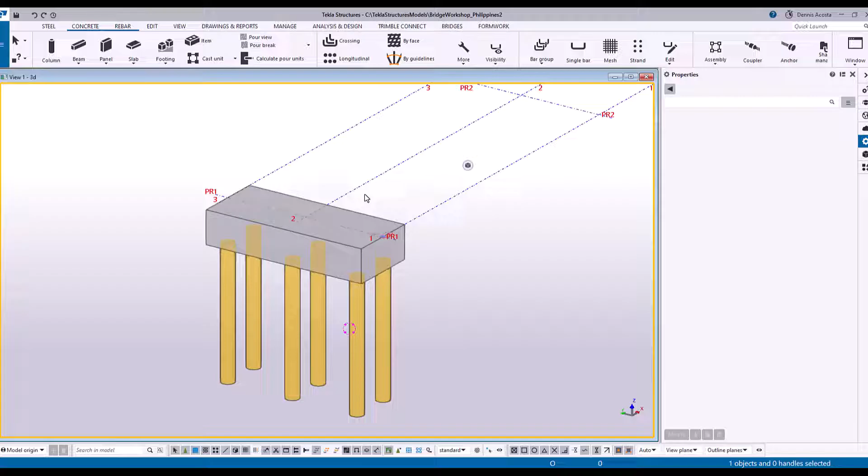Okay, sa pag-create ng ating column na itong ganitong shape, hexagonal, pwede kasi natin gawin yung halimbawa, bibigyan ko lang kayo ng sample. Halimbawa, yung slab, kapag nag-click ka rito ng halimbawa is 3,000, you don't have to follow, just demo it to you.

And then, ginawa natin siyang front, and then halimbawa is 10 meters. So I can use the slab to column, pero pwede ko siyang palitan ng handle dito sa ito, halimbawa ay 300, 300. Okay? I can use the slab.

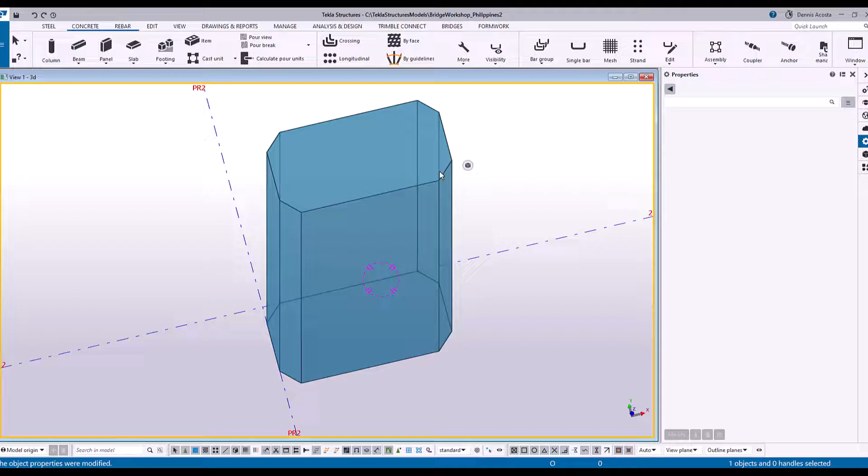Pero sa shape, pwede tayong tumingin ng hexagonal shape under ng column. Type lang natin dito is sphere. So hanapin natin kung meron tayong shape na ganito.

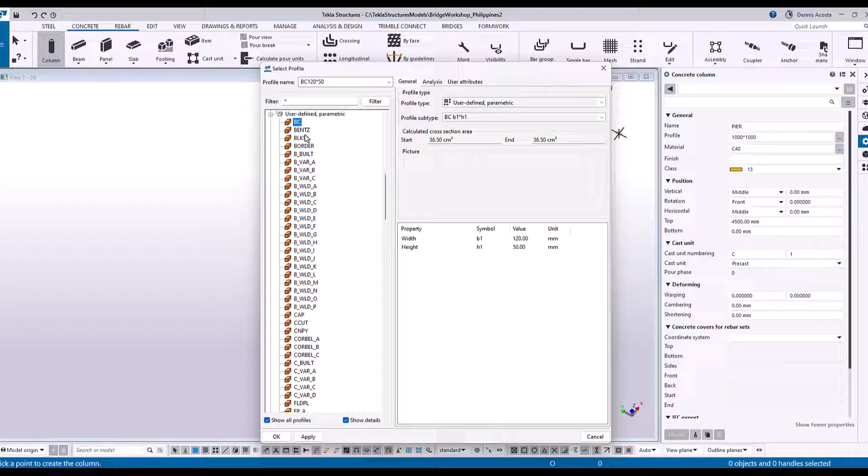Punta tayo dito sa user parametric cross section. Dito mapapansin nyo maraming mga iba-ibang shape na available by default. Okay, hanapin ngayon natin itong hexagonal column na to or yung shape na ito. I think meron akong nakita before. Since this one is parametric, ibig sabihin merong shape, then we can just simply change the size.

Ayun. Nope. I think dito na. It's like a wall eh. Ayun, this one. Hindi. Eto, this one.

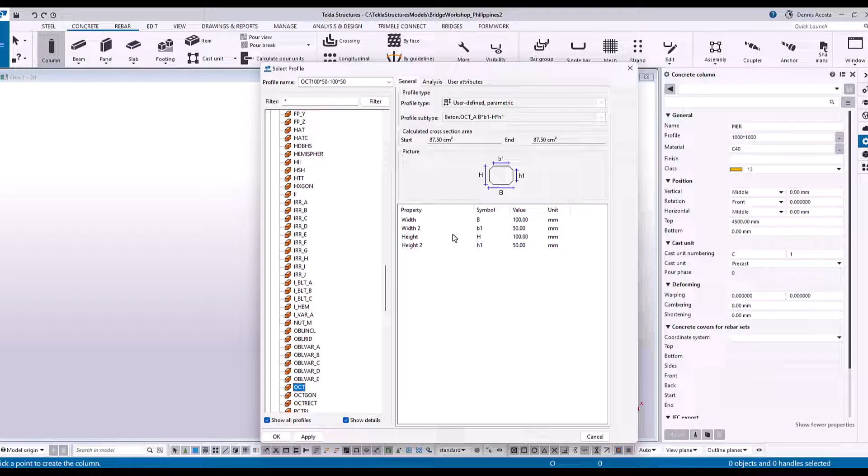Okay? So kung mapapansin nyo, meron siyang octagon. So ngayon, ano yung B? Yung B natin is, let's say, 5 meters. 5 meters yung B. And then, yung H, gawin natin na

Yung H gawin nating 2.5. Iba pala yung way nito, hindi siya chamfer. Anyway, should be okay. And then yung B1, para magkaroon siya ng chamfer, sabihin na natin na 4.5. So meron siyang 250, gawin nating ganong kalaki ba yung chamfer na gusto nyo. And any chamfer, let's say 4.4. Para 300 yung chamfer.

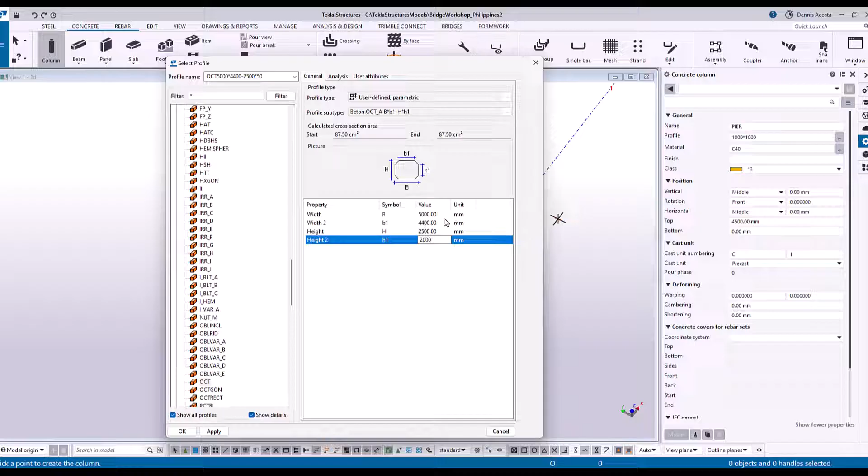And then, this time around, let us change the color. So, top is 10,000. And then, i-click nyo tong center. So, ito yung ating column.

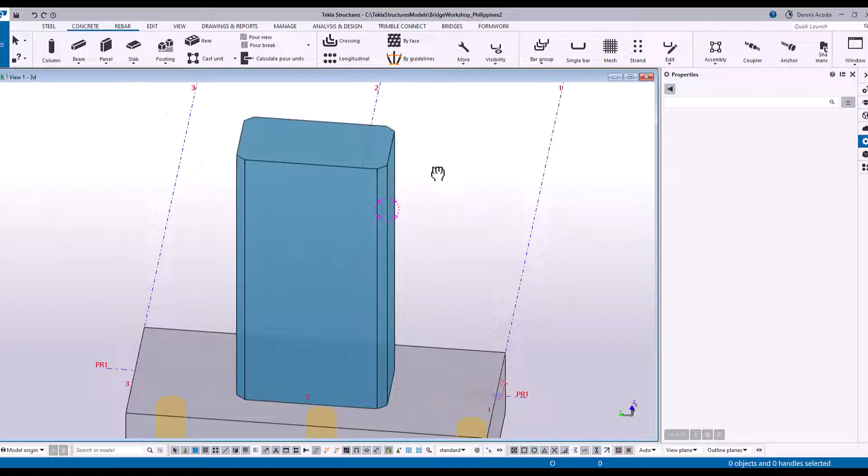So, ngayon, kung naliliitan tayo doon sa chamfer, we can always change it. So ito, halimbawa, instead na 4.4, gawin natin 4,000. Okay? And then, ito, sa halip na 2,000, gawin natin 1.8. So, you can decide kung anong chamfer ang gusto nyo.

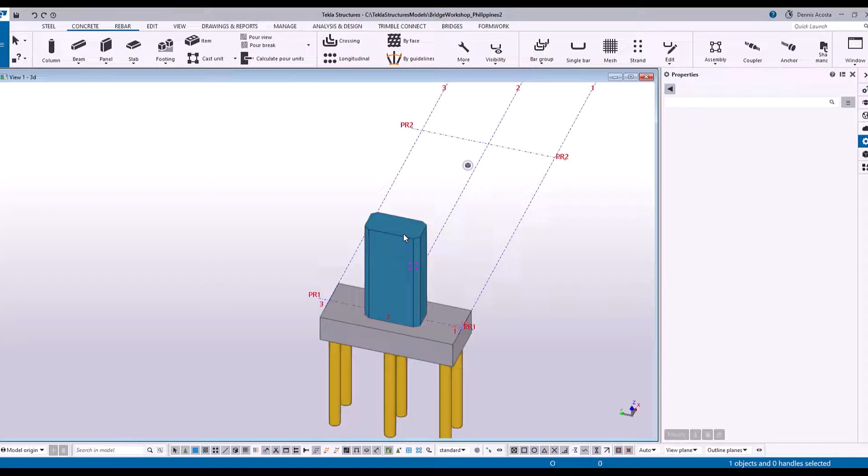Yeah. Ito. Open ko lang yung ano. Okay, this one.

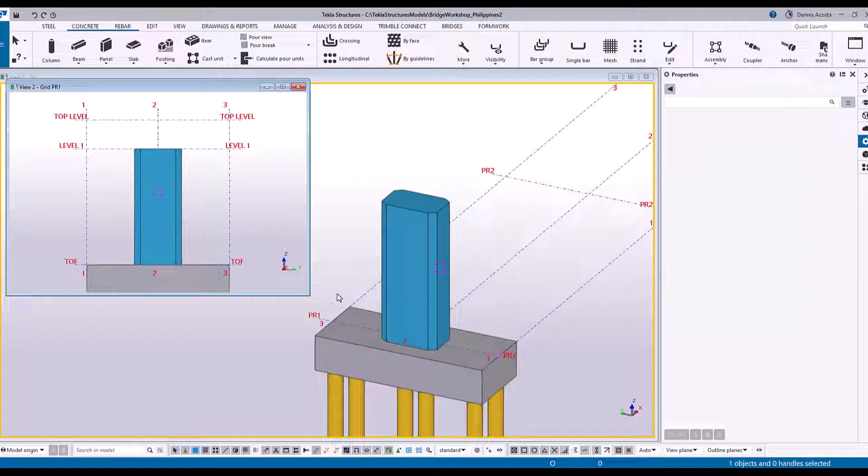Okay, ang next natin ngayon is yung crosshead. The crosshead. Okay, for the crosshead, ang crosshead natin, kindly press Control I, and then paki-open yung PR1. PR1. So ito ngayon yung ating elevation para sa ating crosshead.

So sa crosshead, kailangan naman natin gumamit ng beam. Okay, beam. And then kindly type crosshead. Crosshead. And then ano yung profile natin? Ang profile, ang depth ng profile natin is let's say 2,500. And then by 2,500 yung depth, and then yung width natin is sabihin natin na 3,000.

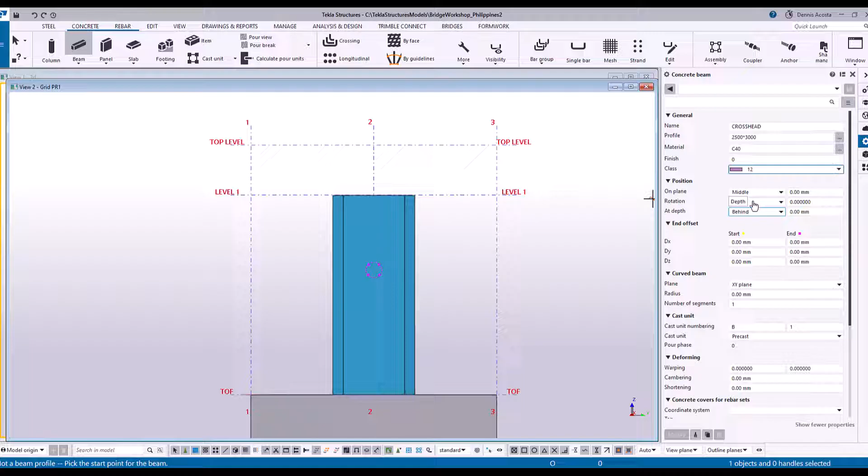Okay? So change natin to sa ibang kulay. And then at depth behind. So all you have to do is to pick from 1 to 3. Expand nyo lang. Ito yung kanina tinatanong sa atin, ano? Do not show this message again. Kapag i-click mo yung expand, lagi siyang mag-e-expand.

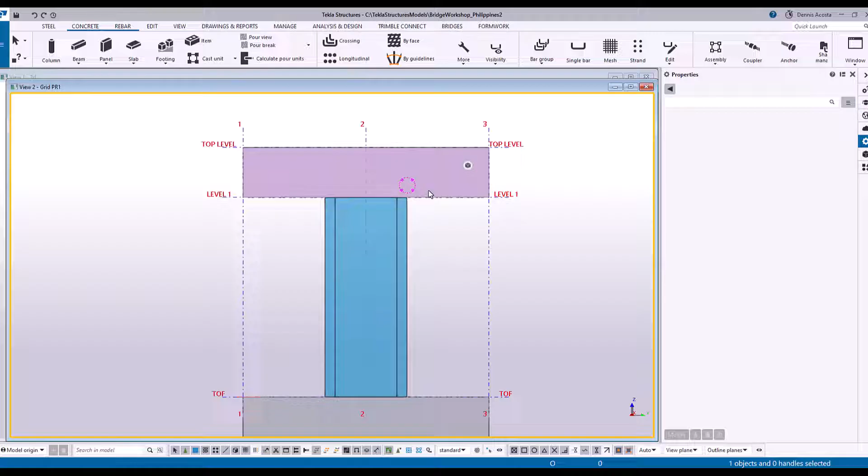Okay, so ito na ngayon yung ating crosshead. So once na meron tayong crosshead, ang gagawin naman natin ngayon is ikakat natin siya according to this shape. Okay? Magkakat ngayon tayo according to this shape. Sige, tapusin nyo muna yung crosshead and then we will continue to cut this.

Okay, we're going to have a modification here. Kung mapapansin nyo, ang width, ang length ng ating crosshead is 12 meters. Gawin natin 8 meters siya. So paano? Naalala nyo, kung familiar kayo sa SketchUp, so meron tinatawag doong push-pull tool. So ganun ang gagawin natin.

Sige sir, good morning. Okay, sa push-pull tool, all you have to do is select natin itong direct modification. Mapapansin nyo, meron tayong direct modification dyan. I-turn on nyo siya. So yung iba sa inyo, naka-turn on na yan, by default. I-turn on nyo lang yung direct modification. And then look.

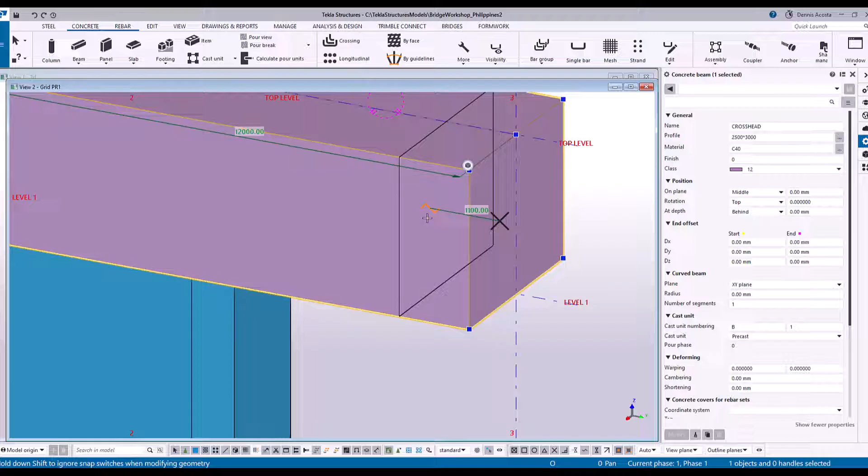Once na naka-turn on yung direct modification and then sinelect mo yung crosshead, ang mangyayari dyan, select mo yung crosshead. Select crosshead, and then mapapansin nyo na na-click ko yung surface, pwede mo siyang i-push, push and pull. So halimbawa, ipupush ko to ng 2 meters. Push ko siya ng 2 meters. Then 2 meters. And then yung kabila naman, ipupush ko siya ng another 2 meters.

Okay? Or sorry, gawin natin 1.5 lang. Or 1 meter lang. Sorry, 1 meter. Push natin siya ng 1 meter. So, naging 10 meters na siya.

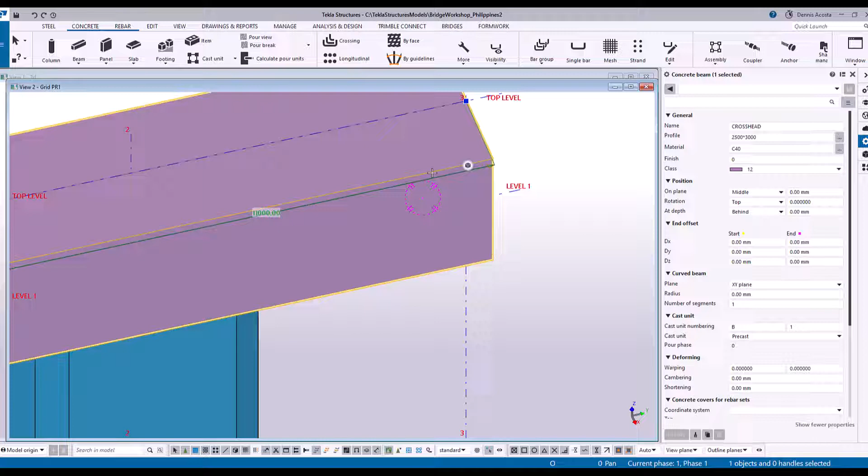Ngayon, kung nahihirapan tayo doon sa push-pull, mapapansin nyo, may makikita kang arrow dito, yung arrow. Once na i-click mo yung arrow, pag sinunod mo yung direction ng arrow and then nag-type ka ng halimbawa 1,000, enter. Diba? Sumusunod siya doon sa arrow. Kapag habang nakaselect yung arrow, nag-type ka ng negative 1,000, then babalik siya. So, yan yung gamit ng direct modification.

Kahit yung width nito, pwede mong palaparin. Okay? Or yung height, pwede mong pataasin. So, yan yung direct modification.

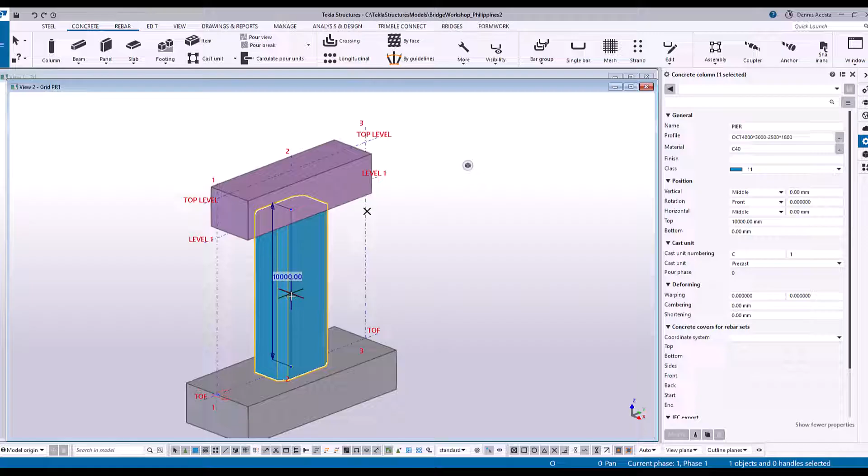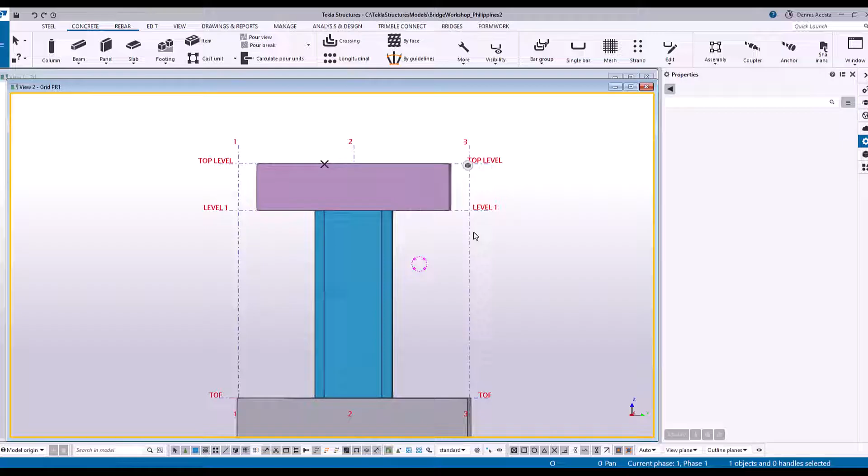So, gawin lang natin 10 meters, ha? 10 meters. And then, once na magamit na natin yung direct modification, you can just simply turn it off. Okay, save natin.

So this time around, we're going to cut this, ha? Control 2. Ngayon, paano natin siya ika-cut nang wala naman tayong reference ng dimension? Okay, remember, in Tekla Structures, meron tayong tinatawag na construction point, under Edit.

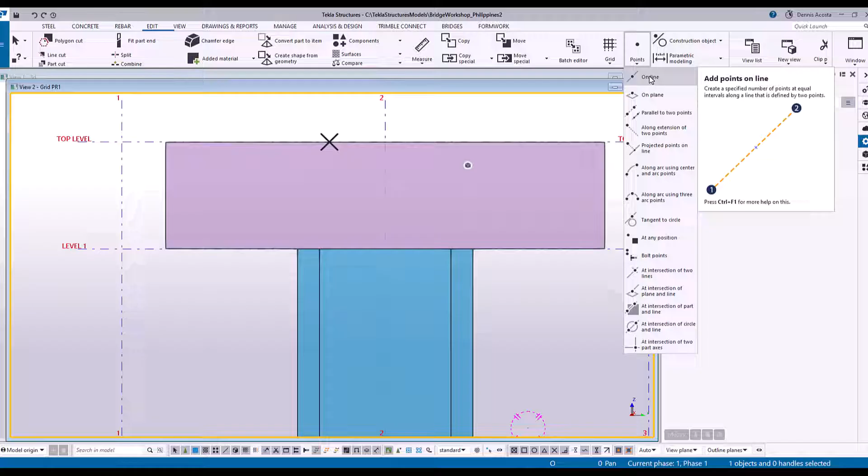Meron ditong construction point. This one. Sa construction point, mapapansin nyo, meron ditong along extension of 2 points. Kindly select along extension of 2 points. Ano ba yan? Select nyo siya, lalabas ngayon dito yung point input, yung value.

Halimbawa, gusto nating mag-offset ng 2,500 from this point. So, ibig sabihin, from this point, mag-offset siya ng 2,500. So, magkakaroon dito ng point. Okay? So, all you have to do is to type 2,500. Apply. So look at this, ha.

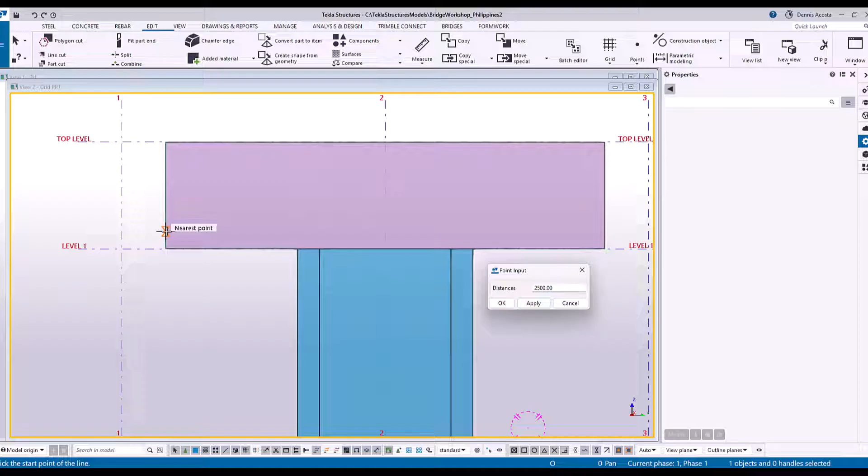Kung mapapansin nyo, along this line, mag-click ako dito sa left side, anywhere on the left side. And then, ang important pick point ko is yung second point. Kasi, doon sa second point, doon magsisimula yung offset ng 2,500. So look. There you go.

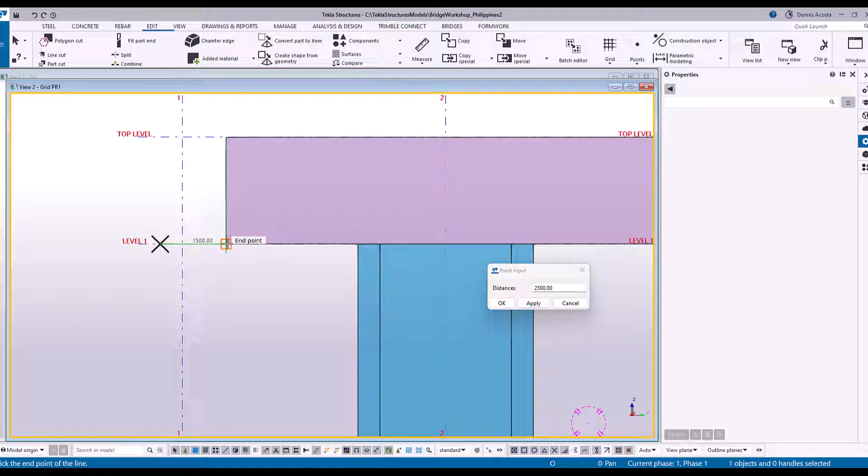Nakuha nyo? Again, point, projected points on, along extension of 2 points. So dito naman tayo sa kabila, magse-select ako ng point anywhere in this line. And then, yung second point ko, make it sure na dito sa corner nitong beam. Kasi, doon sa corner ng beam, doon mag-offset yung 2.5. So, ayun na yung 2.5.

Okay. Do that one. And then, yung next, gagamit pa ulit tayo ng ibang option sa points, construction points. Continue. So, kung ang option natin is magkaroon ng offset na 2,000 dito, here, 2,000. Apply. So, hindi posible yung 2,000. Kasi nga, wala akong reference dito eh. Ang gagawin ko is, I'll put here negative, apply.

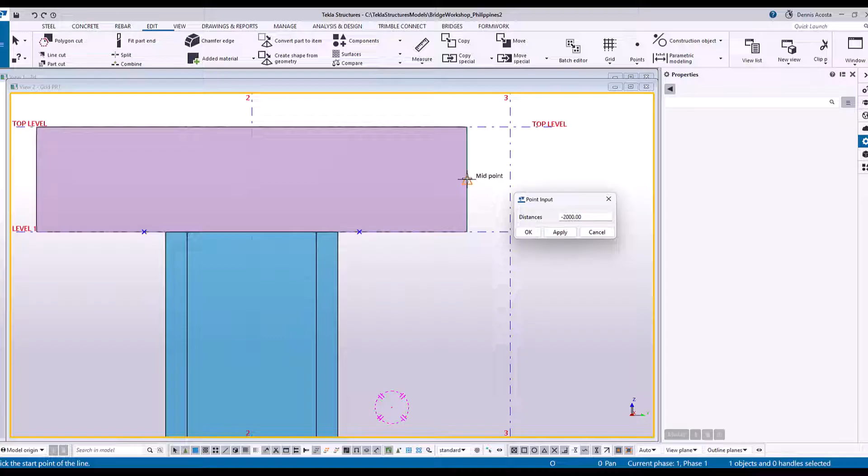So, ang reference ko is ito pa rin. Look what will happen. Pick this one, and then pick this. Ayun. Bumalik siya dahil negative. Okay, ang other option is this.

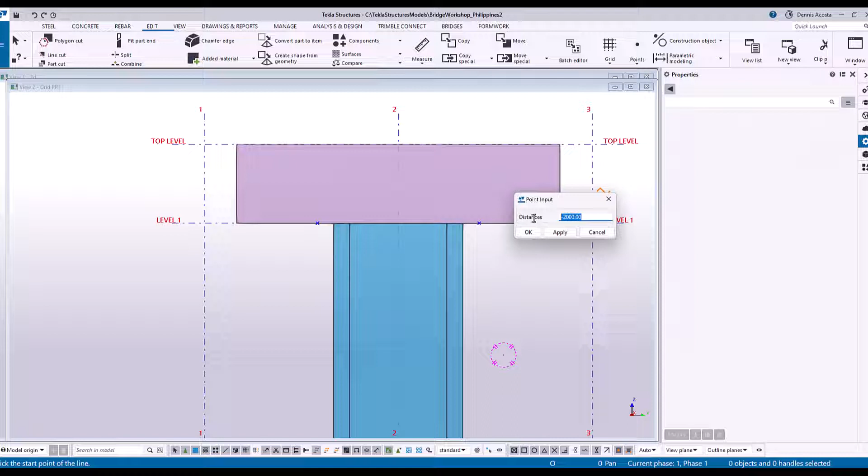Other option is, i-select mo naman tong parallel to 2 points. Itong parallel to 2 points, mas madali. Bakit? Kasi parang nag-o-offset ka. Yung 2 points, ino-offset mo. So, select mo siya. Type mo lang dito ay 2,000 or negative 2,000 as well.

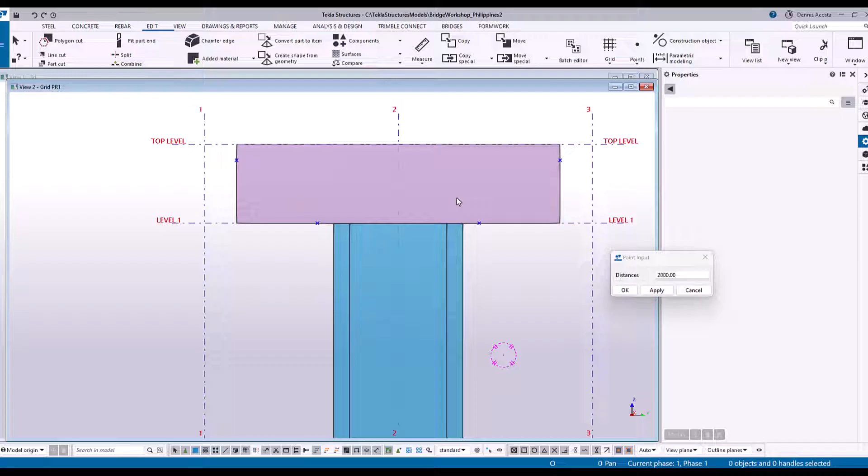Apply. So, look. Kapag nag-pick ako from left side to right side, makita mo yung arrow? Positive, di ba? So, ipapalo niya yung arrow. Kapag right side to left side, negative. Okay? So, positive. Ayun. Meron na tayong dalawang point na in-offset. So, pwede mo na siyang i-cut.

Line cut. This one. Line cut. This one. So, ito na yung shape ng ating beam. Okay? Sige. Kindly try that one.

Pakilagyan nyo muna ng points and then ulitin natin tong line cut. So sa line cut, meron na tayong part dito. Line cut, pick nyo yung part. By the way, dito pala sa part is kapag nakasolid ka, pwede mo siyang i-click dito.

Okay? Pwede mo siyang i-click. Pero kapag ikaw ay naka-control 2, hindi mo siya pwedeng i-click dito. Look what will happen. Object not found. Kasi ano yun transparent. So, kailangan gamitin mo yung control 2, control 4 functionality natin.

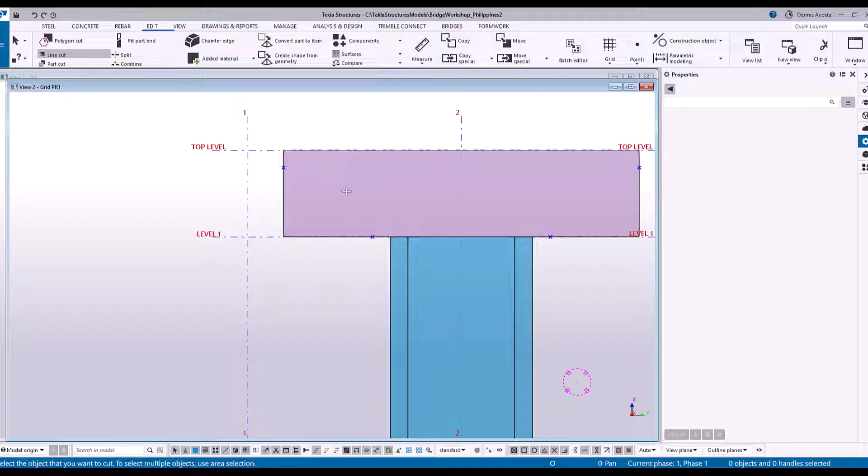So, halimbawa, kung gagawa ka ng line cut, control 4 muna, click, and then control 2. Then 1, 2. Okay?

Again. Ngayon, kapag naka-transparent view ka at gusto mong iselect yung object, kailangan mong iselect is yung edge. Itong edge. And then 1, 2. Mag-highlight naman yan, kaya makikita mo na nakaselect siya.

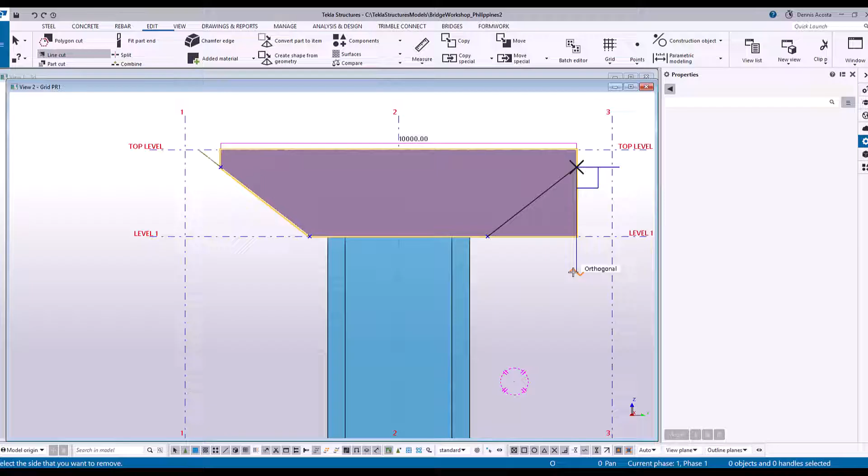Then, ito na yung ating crosshead. Okay, so ngayon dito sa ating crosshead, i-close natin to. So, i-copy ngayon natin to 3 times.

Select. Okay, select. Right-click. Copy. Copy. Sorry. Sige. Select. Right-click. Copy special. Linear. So, going to X. So, from this point to this point. So, kapag nag-pick ako ng 2 points, lumalabas dito yan, yung value sa dialog box.

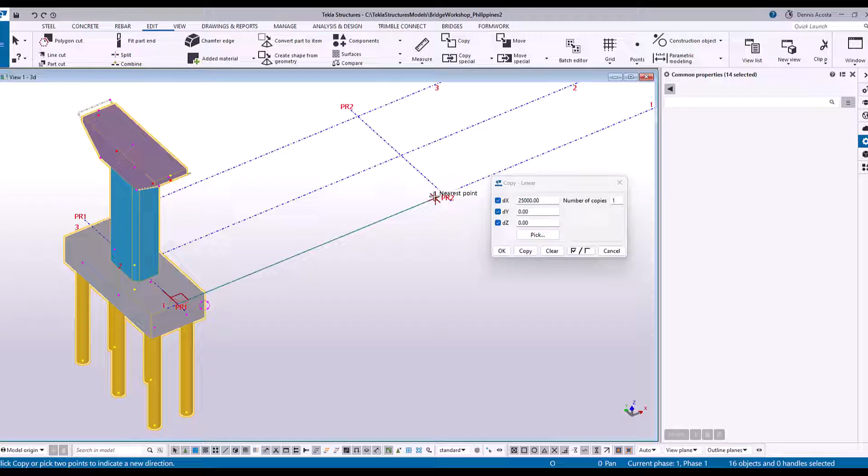So, 25, ang gagawin ko lang dyan is copy 3 times. Copy. Ayun. Kung mapapansin nyo, ang ginawa nating crosshead is

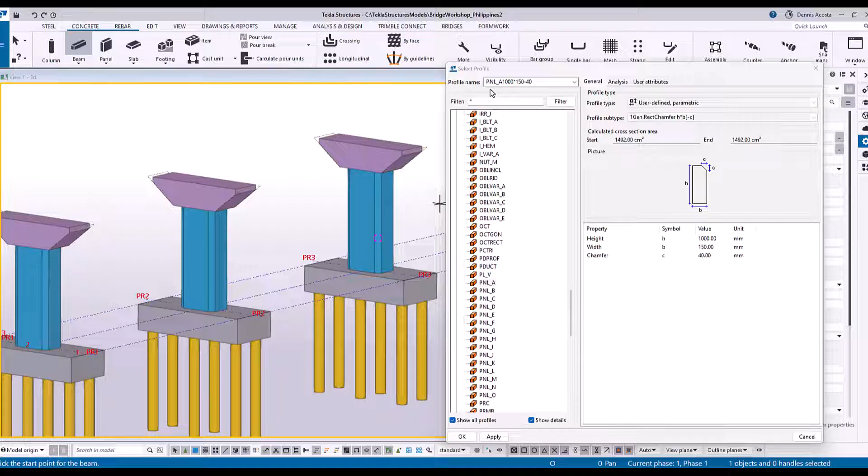made of beam, na rectangular beam, and then ikinat natin. So, basically, sa ating profile database, meron ditong tinatawag na PCTRI. So itong PCTRI, okay, kung susundan natin yung profile nitong ating crosshead, ang B value dito is 10 meters. 10 meters. Ang B2 value is 2.5. B2 is 2.5. And then, ang height nito is 2.5 din.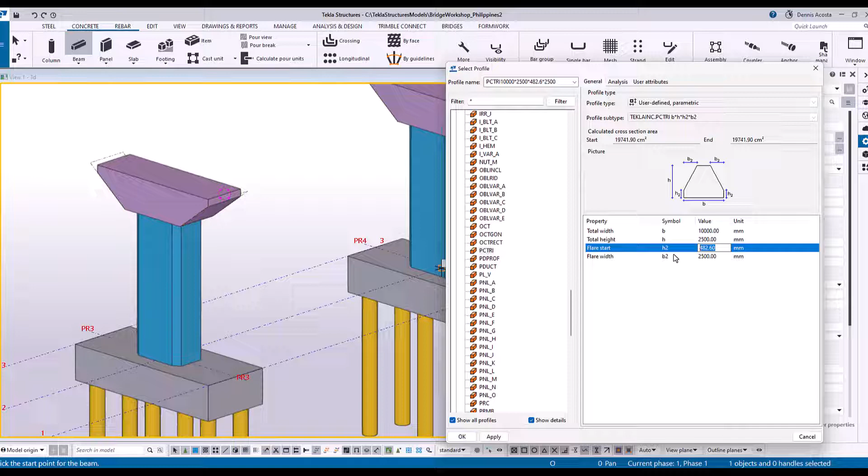At yung H2, gawin natin 1.5 lang, pero yung ginawa natin is 2.5. Apply and okay. Paano natin gagamitin to? Kapag nag-pick ako dito ng 2 points, eto siya. Ang gagawin ko lang dyan is i-rotate ko siya below. Yes, see? At rotate ko siya ng front, so same lang din siya. Ito is without a cut, so pwede natin gamitin yon.

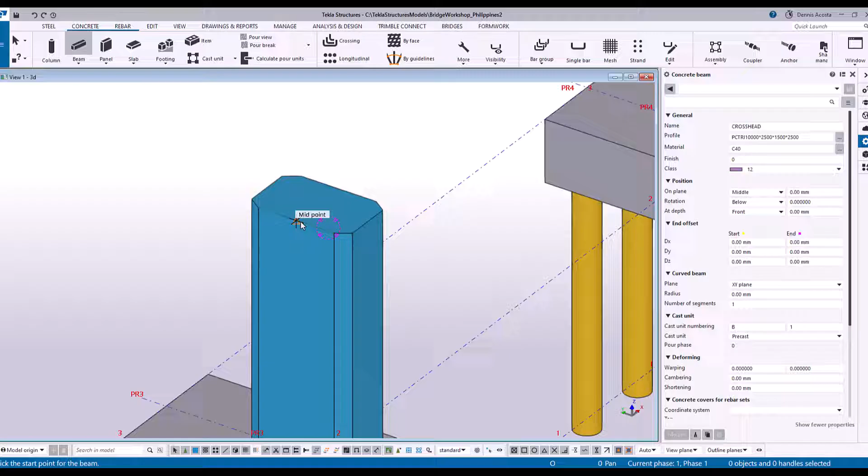Ulit ha, halimbawa, ito wala tayong, itong dalawa na to, papalitan ko. Halimbawa, from here, select ko lang siya, 1, 2. Ayan o. 1, 2. Wala na tong cut kasi ginamit ko yung profile from our database. I-try nyo hanapin yung PCTRI.

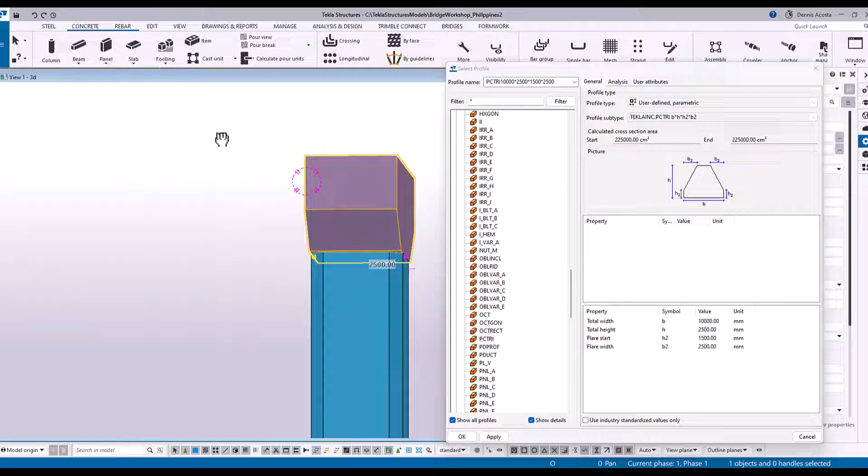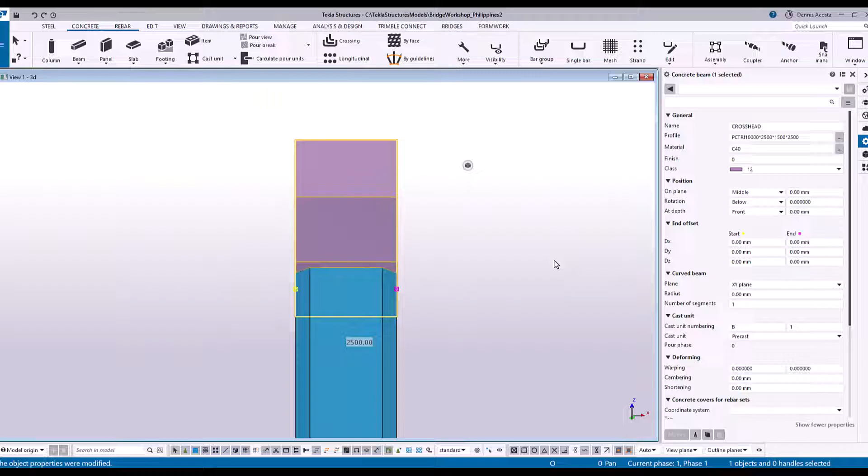PCTRI, ito siya. Kung gusto natin ng merong halimbawa, additional 500 dito, ang gagawin lang natin is, look, pwede tayong maglagay dito ng negative 200 and then here is 200. Modify, so meron tayong wing. Ulit, this one negative 200 and then this one is 200. Enter. Yun, ito na yung ating crosshead.

PCTRI, i-click nyo lang to and then type nyo rito sa filter, PCT filter. Ayan lalabas na siya, PCT star filter, so lalabas na siya. Kailangan nyo lang sundin itong value na to: 10,000, 2,500, 1,500, and 2,500. Meron tayong dalawang different way ng pag-create ng ating crosshead. Gaya ng nabanggit ko, in Tekla Structures, there are different ways to do things pero same outcome and same output.

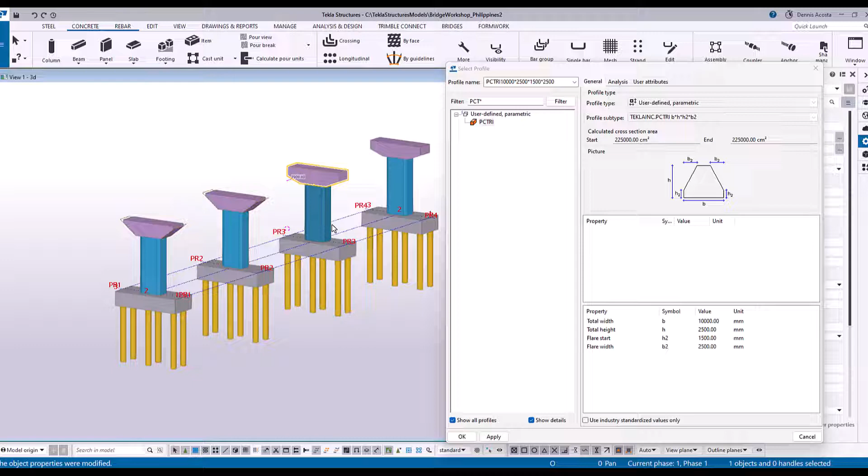Before we add the bridge deck, okay, the box girder there, I want you to add a point here. Kung mapapansin nyo dito, itong surface, itong taas na to, kailangan natin mag-pick, kailangan natin mag-pick dito sa center. Kung wala tayong reference, kailangan natin mag-add ng point. Meron tayong tinatawag na online. Online, so under the construction point, merong online. Itong online, so ano itong online? This online will divide the points.

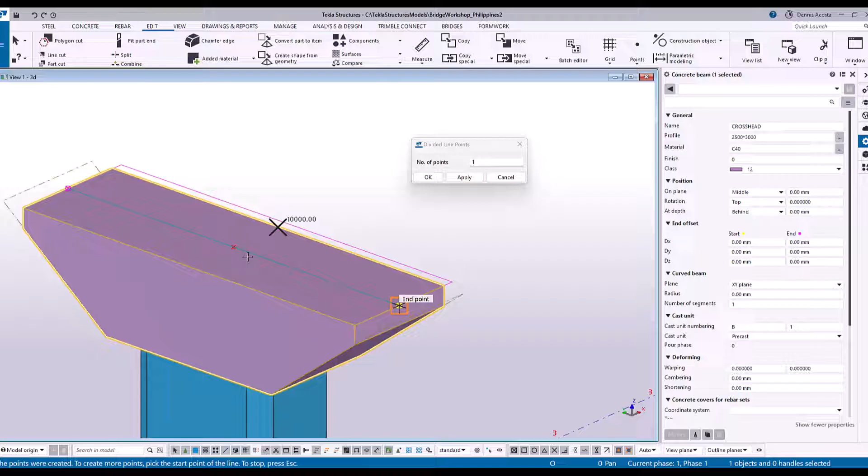Depende kung how many points you want to use. Halimbawa, by default, ang divided line points is 1 point. Ibig sabihin, pag ipinik ko tong midpoint nitong top ng ating crosshead, 1 and then 2, ayun, maglalagay siya ng point doon. Ulit ha, so here, 1, 2, maglalagay siya ng point sa taas. 1, 2, maglalagay siya ng point doon.

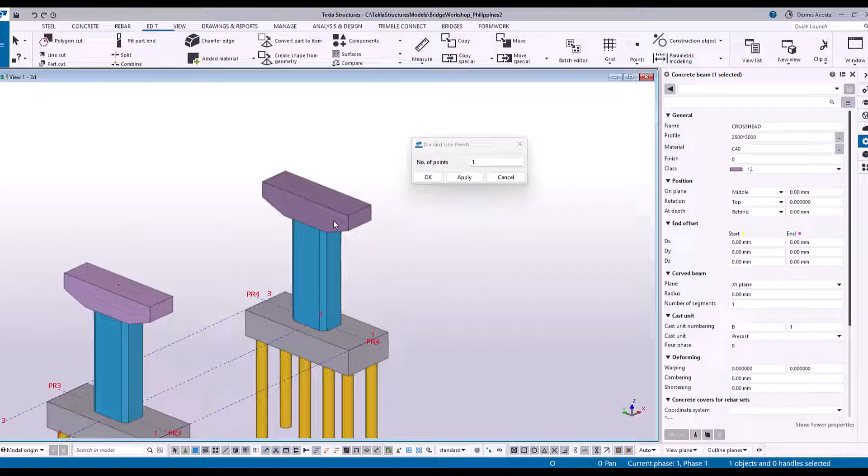Halimbawa, in this case, ngayon, kung ang ilalagay natin dito is bridge girder, ang gagawin natin is this. Hatiin natin to sa 3. Gawa tayo ng 2, apply. 1, 2. And then 1, 2. Meron tayong 2 points dito, no? Tanggalin natin tong center point.

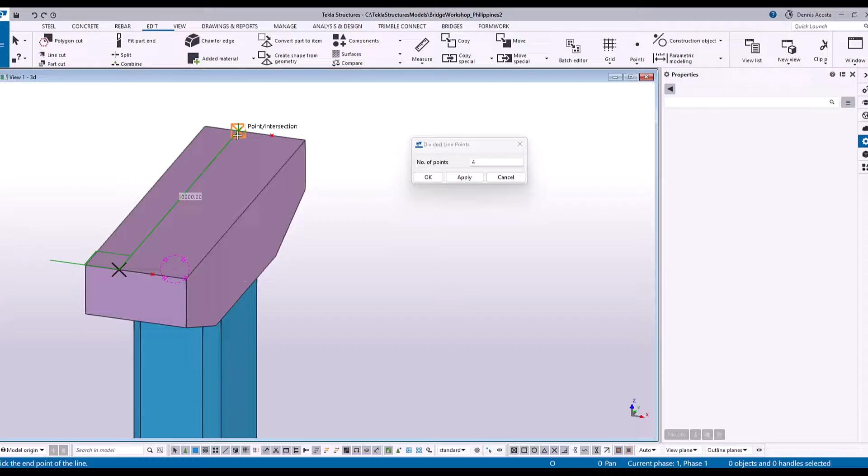Dito ngayon, ang gagawin natin is using the divide line. Ginagawa ko lang is nagdi-divide ako ng points. Halimbawa, gusto natin ng 4 equal spaces. Apply, so pick mo to 1, 2. Tingnan natin, ayun 4 equal spaces or 5 equal spaces yan. And then ito, or sabihin natin 3 lang pala, 3 equal spaces, or 4 equal spaces. Apply 4 equal spaces here. 1, 2, ayun, dito is 1, 2 rin.

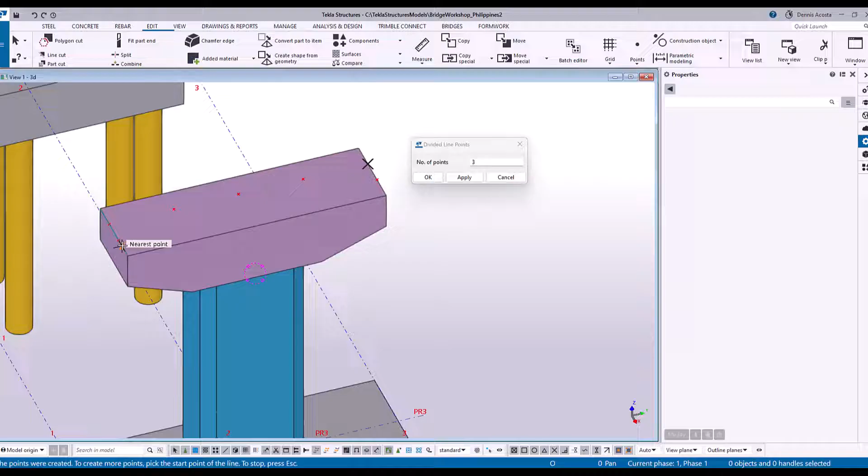So, there you go. Magagamit natin yung mga construction point na yan later, kapag nag-add tayo ng ating box girder or yung bridge girder. Okay, so just leave as it is and then don't forget to save your work. Save it.

Okay, so to add the profile from AutoCAD, punta tayo dito sa right hand side, makikita nyo yung Application and Components. I-type nyo lang dito yung DWG. So sa right-hand side, makikita nyo yung dulo na 4 na icon, i-click nyo siya, that is Application and Components. Pag lumabas yung Application and Components, type nyo lang DWG. Meron tayong component na nakalagay dyan, DWG Profile to Library. Ibig sabihin, yung drawing natin sa DWG, yung shape, i-import natin para magamit natin as a profile sa ating library.

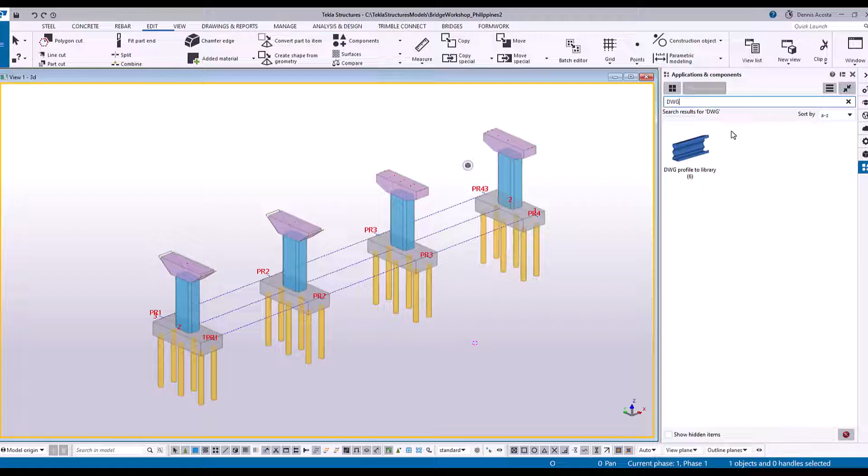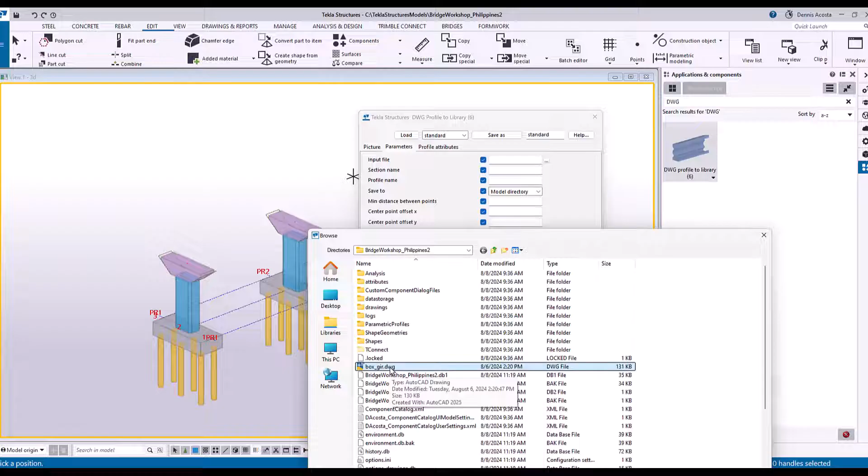Okay, then again, just make it sure, kung gagawin natin to later, make it sure na yung profile natin doesn't have any dimension, doesn't have any annotation. Kailangan is just a simple profile, gaya nung nandyan sa example natin. Okay, so all you have to do is to double-click the profile to library. And then under this one, you can see the parameters, and then here, you click the input file. Ibig sabihin, ibabrowse natin yung profile. Ang file name na nilagay natin dyan is boxgirder.dwg. So kindly open it. Ah, wala siya. Okay.

Sir, can you open the Box Girder DWG. The whole Dennis folder is there.

On the section name, once we select this Box Girder DWG, for the section name, let's type BDEC.

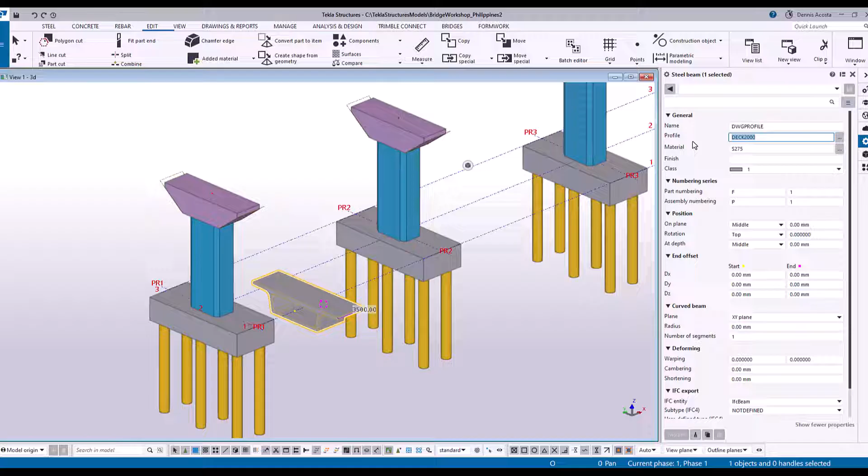So you can close this one now. Because once you use this profile, this component won't be the one we use anymore - what we'll use is this, look, DECK2000. It's already here in our concrete beam.

Let's go now to the concrete beam. Let's type here bridge deck. And then here, let's type DECK2000. Alright? DECK2000, so there we go.

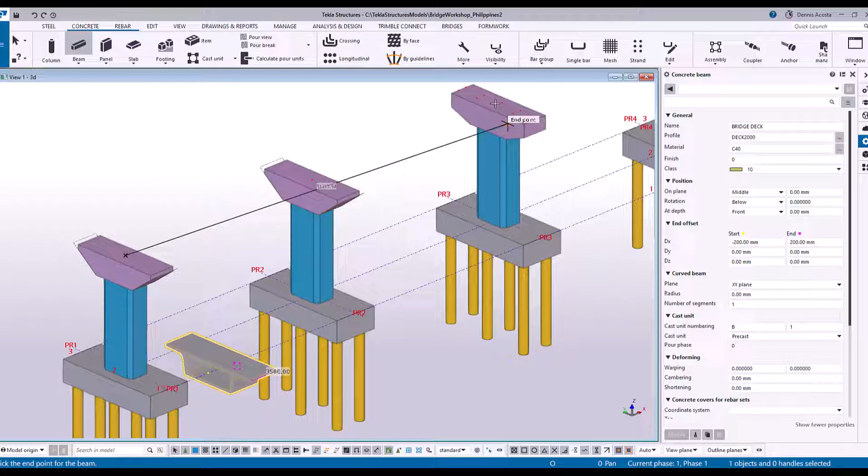All you have to do is to pick 2 points. 1, for example up to here. 2. Oops, it's flipped, so no worry - front, top, sorry, top. So this is now our bridge deck.

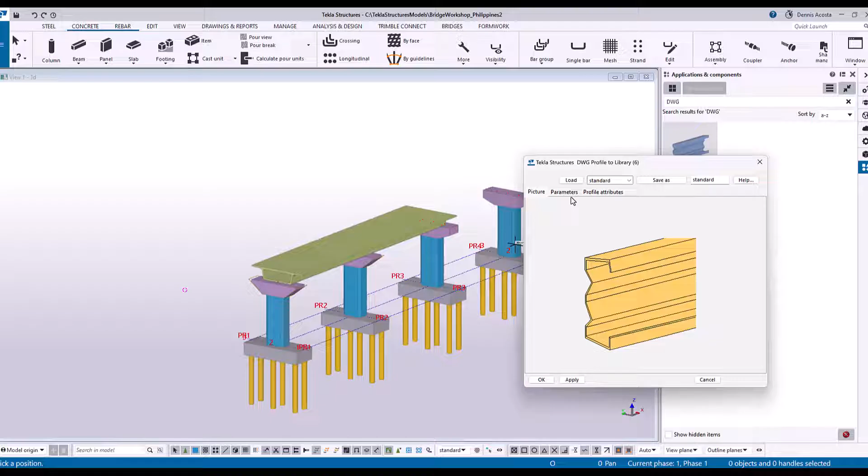So again, once we select the DWG and we've created it here, we don't need to use this anymore since it's already saved in our profile. So what we do now, under beam, it's already here, saved in our database - see, Bridge Deck 2000.

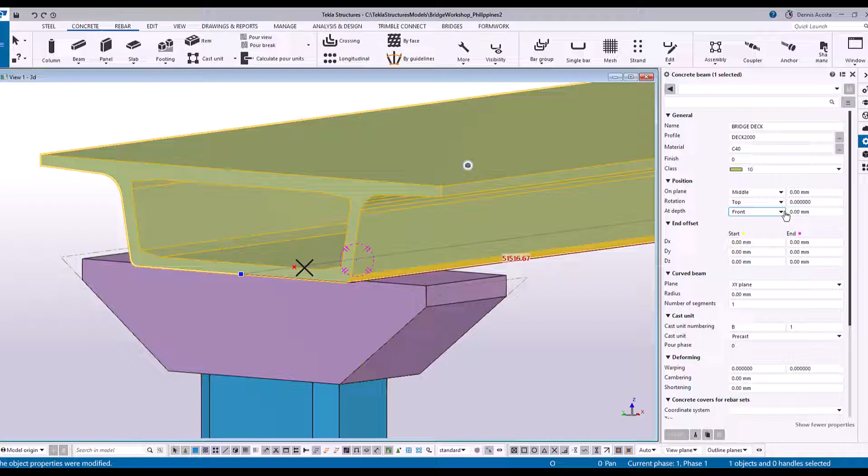So if we raise it up a bit, all we have to do is select this and then zero this. If you notice, from front, let's just put 250 here, enter, and it rises. 250, enter - so that means from front, it moved by 250. We can control its movement.

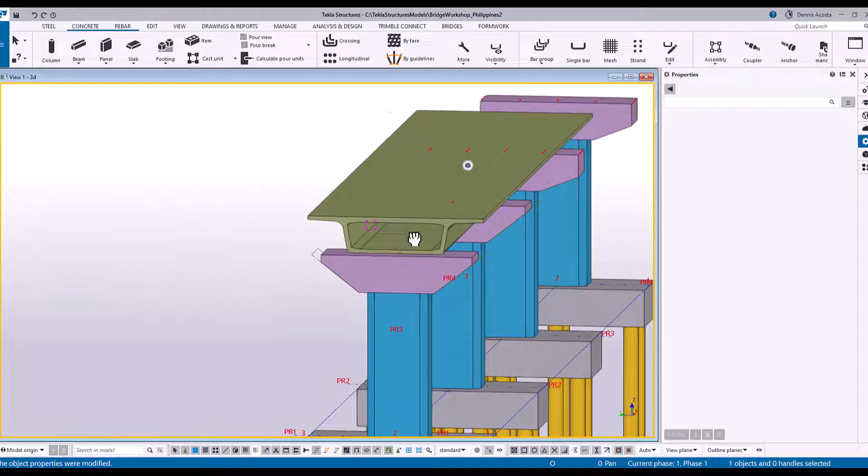Under Application and Component again, I want you to select these 3 bars. Select the 3 bars, and then import custom component - click that, select the 3 bars, import custom component.

So now, what custom component do we import? Going back to the folder, in the Dennis folder, you'll see the HYD bearing there, so import that. Import.

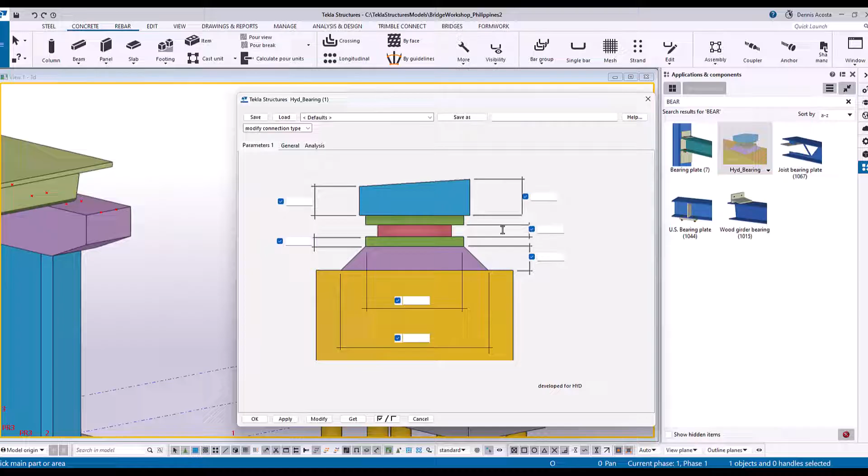The question now is how to use this. It should be select the part and then pick the point. It will appear there.

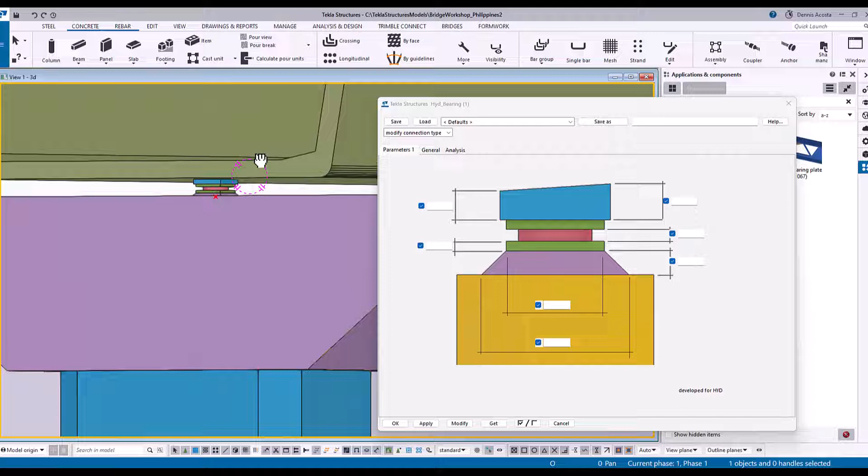So let's just make this 60, 60. Or yes, modify - it's straight. So apply.

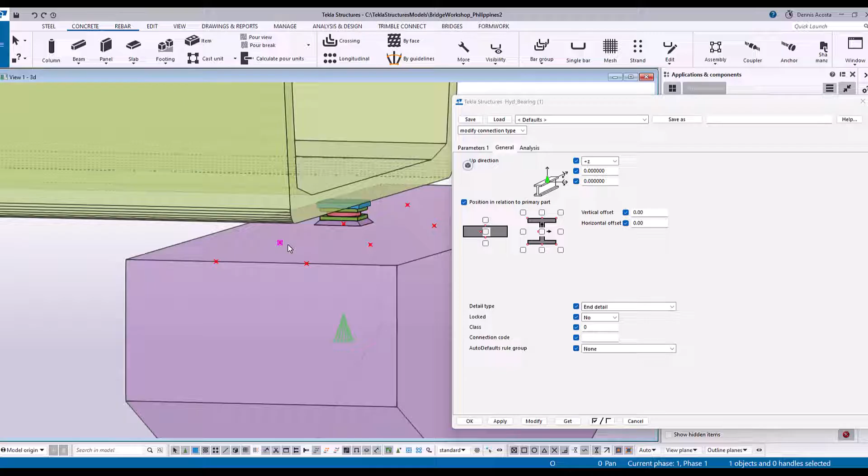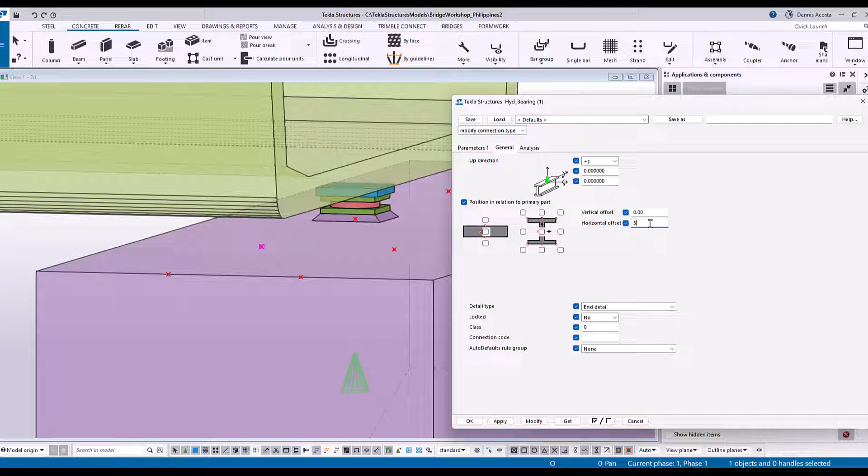For example, here in Z is 500, modify - no, that's not it. Okay, 0, modify, and then the horizontal offset is 500, modify. There - so this is its control.

For example, negative 2,500, modify. There.

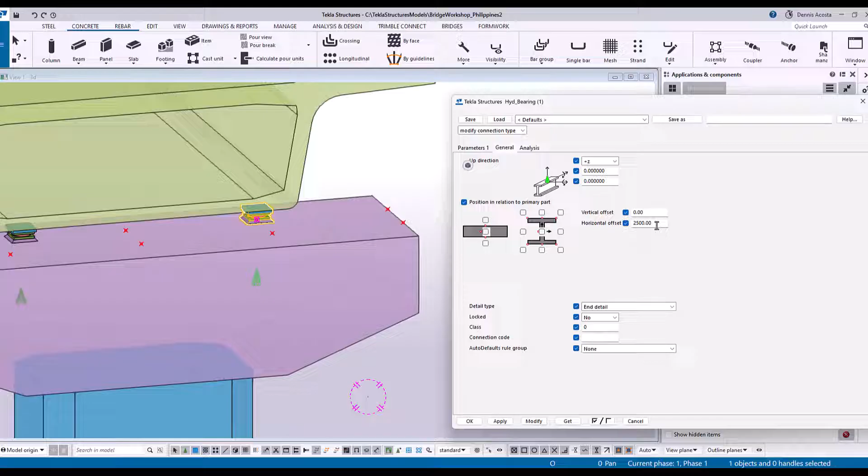Kung masyadong malayo, negative 2,000, modify. At then this one is positive 2,000, modify. So pwede mo pa rin pala siyang may control. Kasi nung isang araw, ang ginawa namin dito is in-explode and then we move, so nalimutan ko na meron pala siyang control dito sa loob.

Okay, so ito yung ating sample ng bridge deck. A very basic one, siyempre very basic, para lang at least ma-feel nyo kung paano gamitin yung sa modeling. And then afterwards, siguro later,

In the afternoon, we're going to add the reinforcement. We're going to add the reinforcement. So at the moment, ang ginagawa natin is gumagawa pa lang tayo ng modeling.

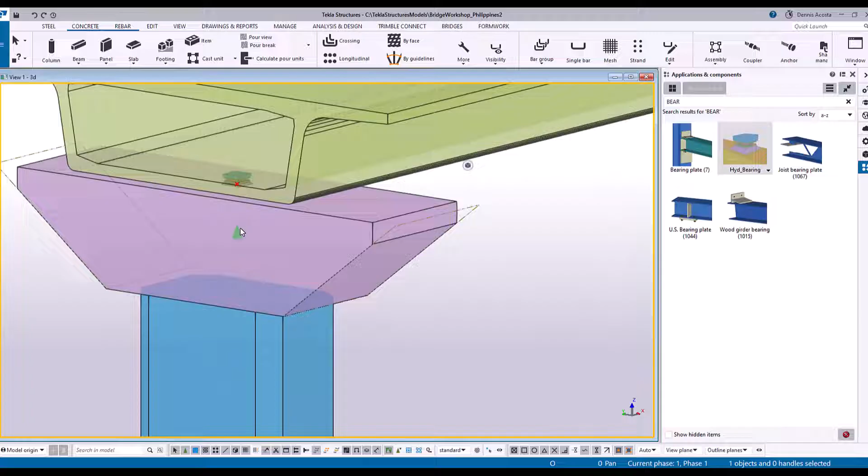Okay, by the way, kung mapapansin mo na i-set up natin itong halimbawa dito, kung i-move natin siya, siguro move natin siya ng 2 meters.

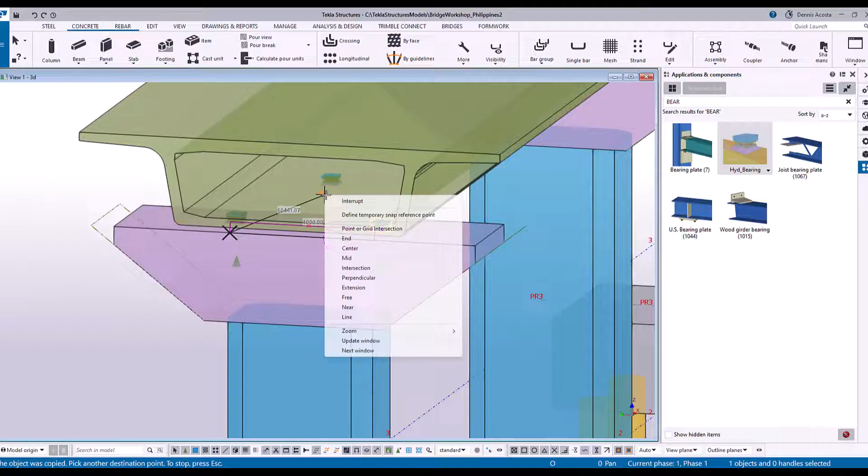Ayun, and then copy, pwede mo na siyang i-copy rito ng 4 meters. Ayan, and then kung gusto mo siyang i-copy from one box girder to another, i-select mo lang itong dalawa na to. Select, and then right-click, copy special to another object.

Ano yung copy special to another object? Pag pinik ko tong to another object, i-select ko lang yung source, and then ito yung destination. Kakopy na siya doon sa other side.

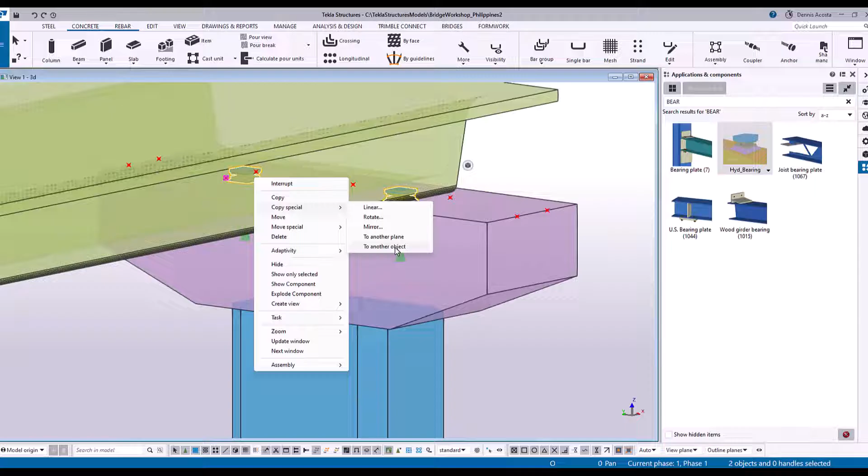Okay, again select, halimbawa itong dalawa na to. Select, right-click, copy to another object. So select mo tong source, and then ito yung destination. Lilipat siya sa kabila.

So ganon din sa reinforcement. Kung meron ka ng reinforcement dito sa isang to, pwede mo siyang i-copy to another object.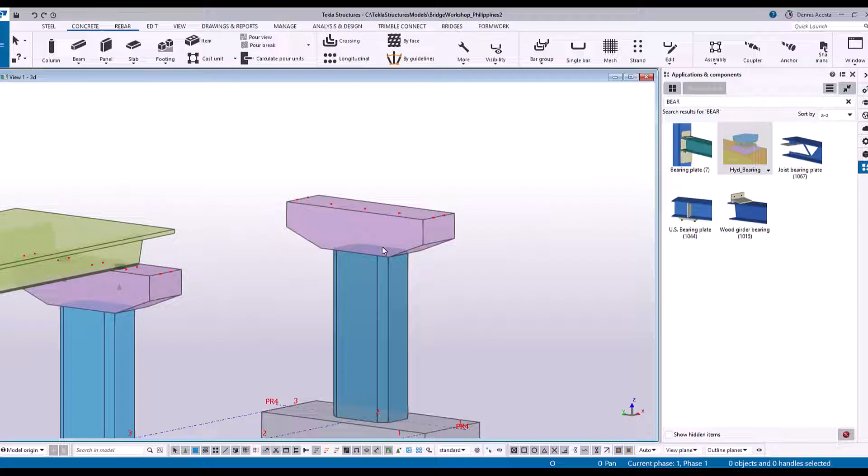Hindi, so far, dito sa component na to, you have to control manually. Pero yung automatic na yon is possible kung gagamit ka ng third party like Grasshopper, or may mga software na kailangan mo nang gamitan ng script programming. Pero minsan, you spend a lot of time to program that simple thing. Much easier to control it here.

Kaya meron tayong parameters, so mas madaling i-control.

Okay, so ang next natin, kung tapos na tayo dito, meron pa akong gustong ipa-import sa inyo. Punta tayo ulit dito sa import. Import, custom component. This time around, ang i-import naman natin is yung bridge girder.

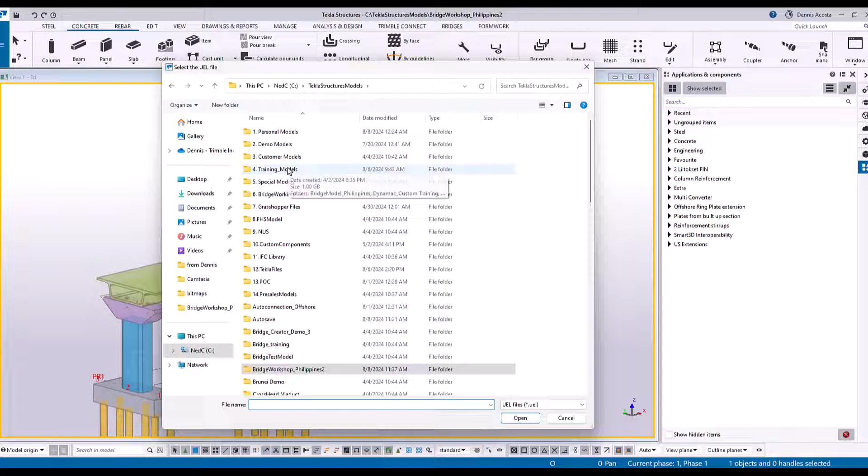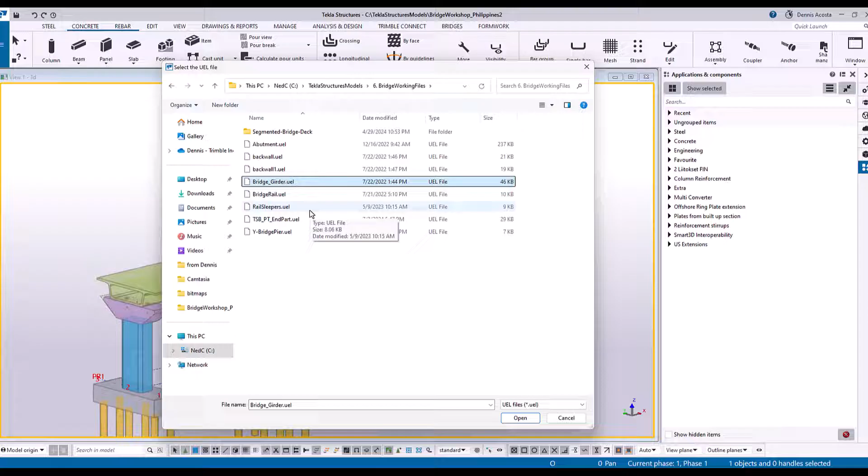Okay, bridge girder, so saan natin kukunin yon? Select nyo yung UEL, bridge girder UEL. So open, nakita nyo? Bridge girder UEL. So click nyo lang siya and then open. UEL.

So dito makikita nyo, bridge girder. Ayun, bridge girder. Pero along this, meron kasing profile na ginawa ko dyan, so kailangan pa rin nating import yung profile. So paano natin i-import yung profile?

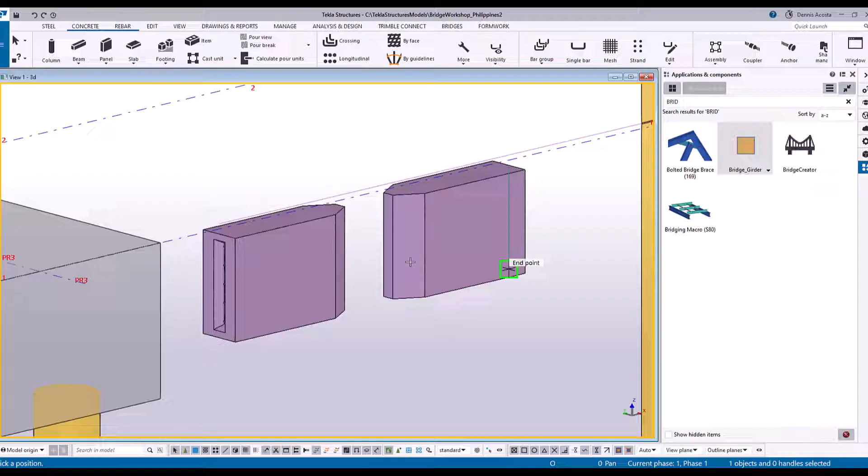Under ng, punta kayo sa catalog. Okay, catalog, kasi dito kapag ginamit natin itong bridge girder, hindi pa siya kompleto. Mapapansin nyo, tingnan nyo. So kulang, okay? Meron pa akong I section na ginawa para makumpleto.

So paano natin kukunin yon? Okay, go to the catalog, catalogs, and then profile catalog. So sa menu, catalog, profile catalog. So under this, you click import.

Import, so punta uli kayo doon sa, from Dennis, and then makikita nyo dyan, BR profile. Select nyo yung BR profile and then hit OK.

BR profile, LIS, not LIS, hit OK. And then select nyo yung BR profile and then merge. Merge and then continue.

So dito sa ating profile catalog, once na sinelect mo yung okay, maglalagay dyan, save. Save changes. Kapag walang lumabas na save changes, ibig sabihin wala kang na-import na bagong profile. So isave mo lang yung changes, and then that's it.

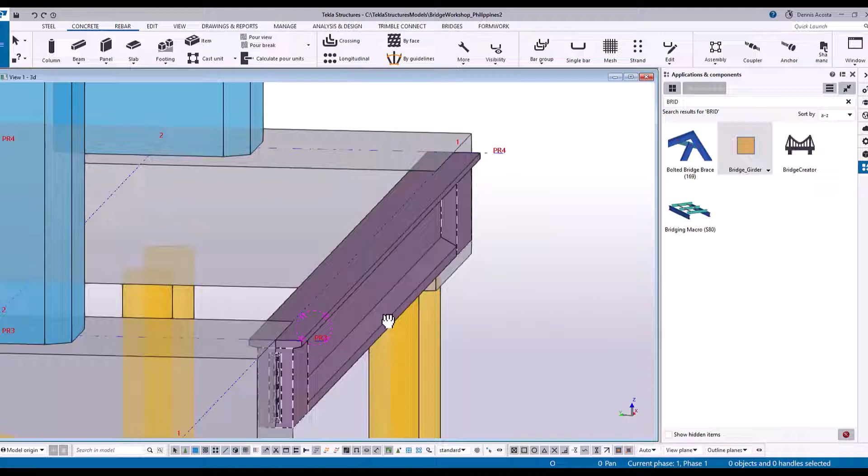So ngayon, tingnan natin ha, kanina, nung ginamit ko tong bridge girder, ang lumabas lang yung dalawang block. So ngayon, after importing that one, ito na yung bridge girder ko. Okay? Are we clear? And then ilagay lang natin yung bridge girder doon sa taas.

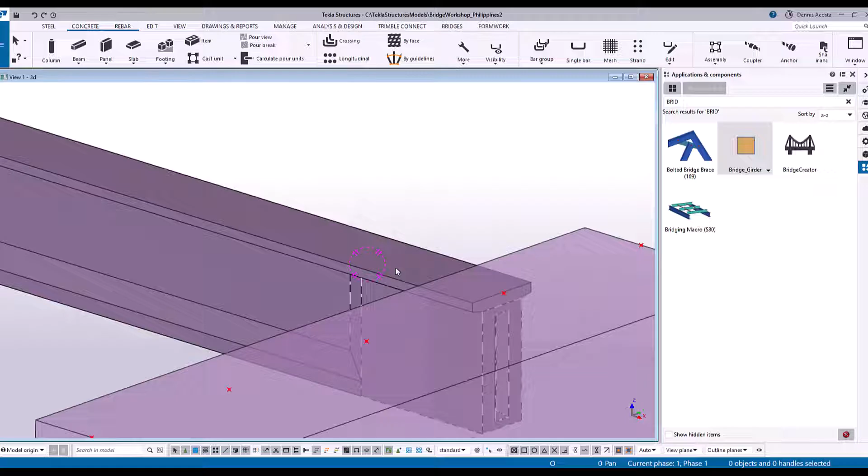Ayun no, taas, this one here. Pero kung mapapansin natin, nasa baba siya. Yung position, gawin natin siyang 0 and then front. Modify. Or gawin natin front 250 uli. Modify, para pwede tayo maglagay ng bearing dyan.

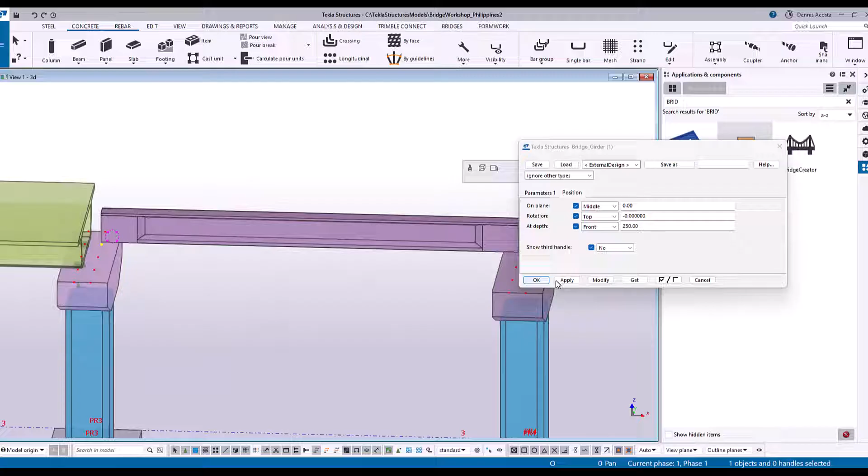Okay, apply and okay. Or else you can copy. By the way, dito pala, kasi kailangan natin pala siyang i-extend, pwede mo siyang gamitan ng direct modification. So sa direct modification,

i-click mo lang to, and then you type, let's say, another maybe 1,000. Enter. See? And then here, i-click mo lang yung arrow. So kung mapapansin mo sa direct modification, meron siyang arrow. Itong arrow na to, click mo lang to ng 500.

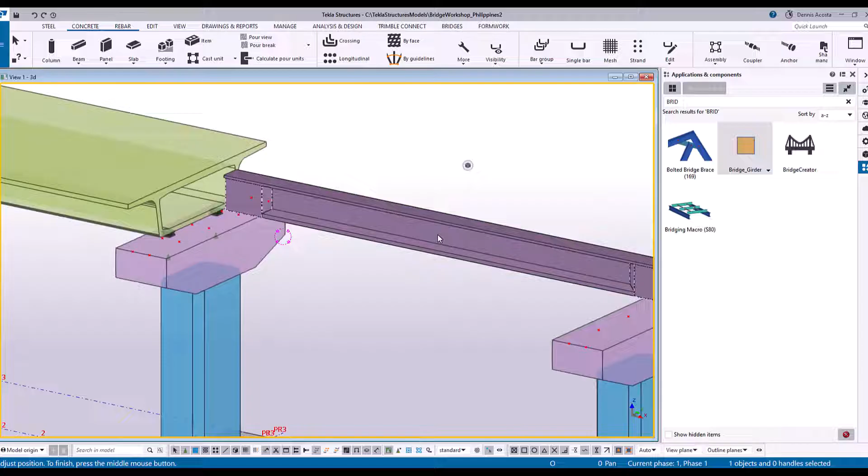So all you have to do is to copy. Copy from this point to this point to this point. So meron na tayong bridge girder dyan. You can make it 5 or you can make it 4. So depende sa pagkakalagay nyo ng reference. Okay?